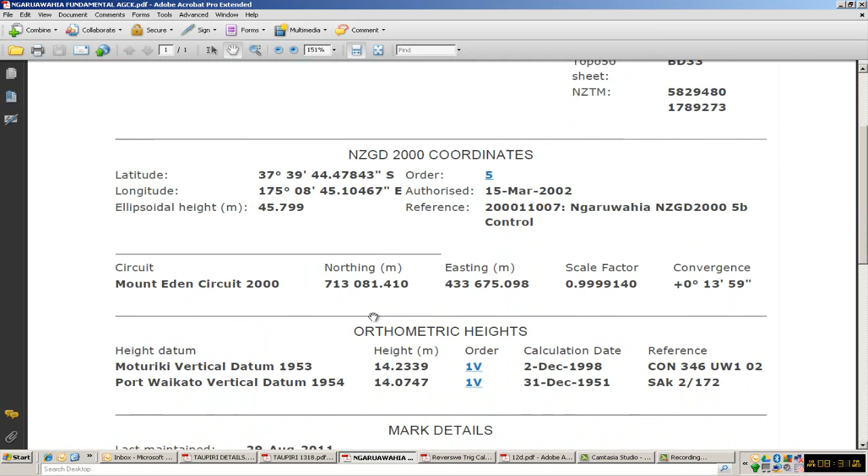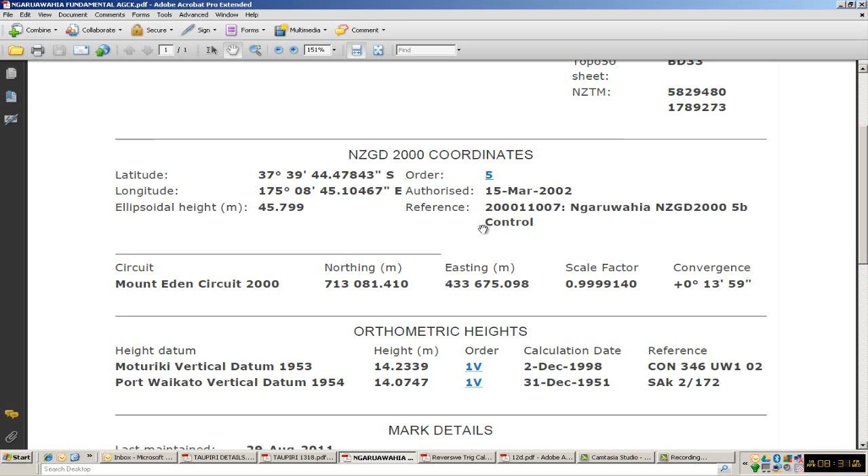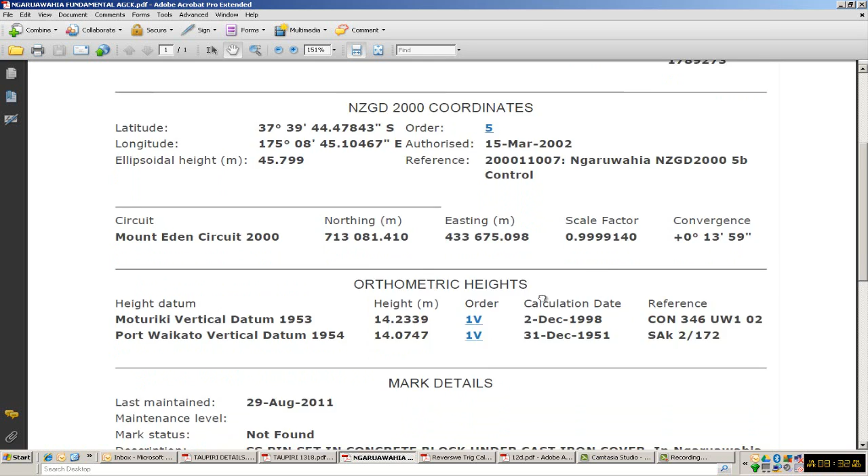Now we're going to be working in Mount Eden circuit coordinates, so we can see here that we've got the coordinates down in here, Mount Eden circuit coordinates, and we'll note that these are in New Zealand Geodetic Datum 2000 terms and they're fifth order coordinates. So they're reasonably accurate. It's a really substantial mark down by the band rotunda at the point. We'll also note here that it has heights in both Moturiki datum and Port Waikato datum, and the heights on this mark are to first order vertical. So that's a pretty substantial and significant mark.

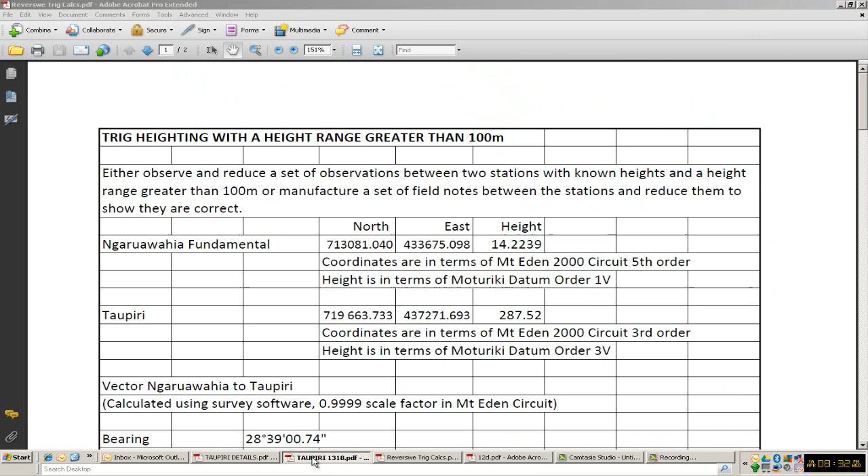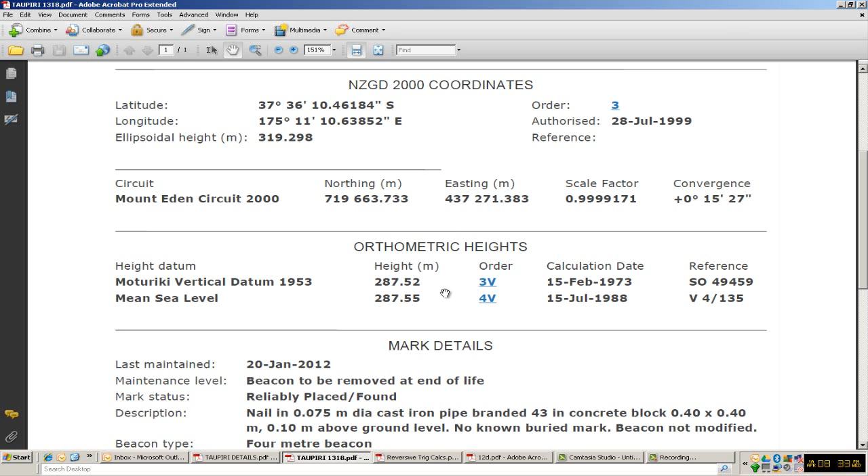And the next mark that I was going to observe to is Taupiri Mountain, a very significant mark in the area, and one that a lot of people would have driven by. So it's a significant third order trig. We see here it's got Mount Eden circuit coordinates. They're the ones we're going to be using, and it's got heights on it in terms of both Moturiki and mean sea level. So we're going to use the Moturiki height, which is a third order vertical height. Just notice that it's given to 2 decimal places. So not incredibly accurate as with the first order, but probably accurate enough for us to get some good value out of the exercise.

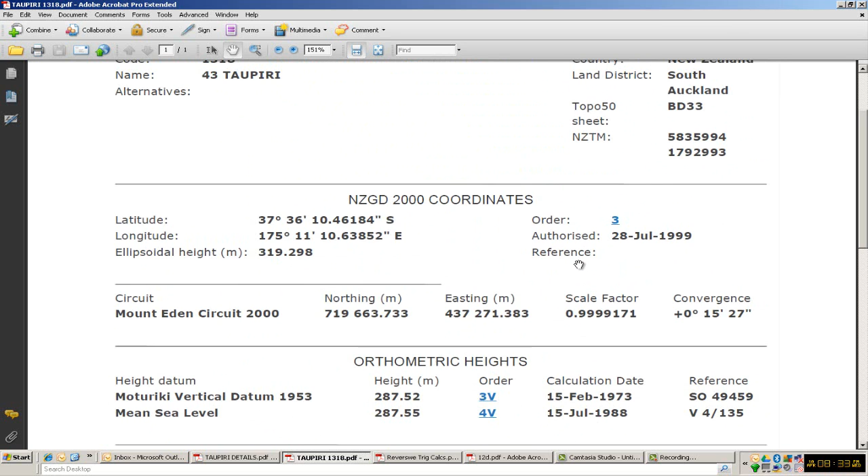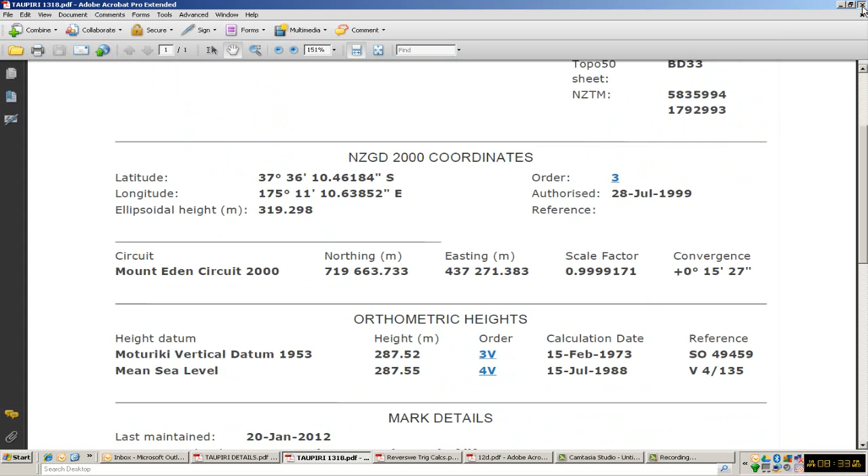Just a little bit of detail here about the mark. It's a 4 metre high beacon, so it's quite a significant beacon, and as far as I'm aware we can see it from the Ngaruawahia Fundamental, but for the purposes of this exercise that's not an absolute requirement. So here we go. I've put down our details, which I've copied, as I say, from the geodetic database, the LINZ site, and all those details that you saw on it.

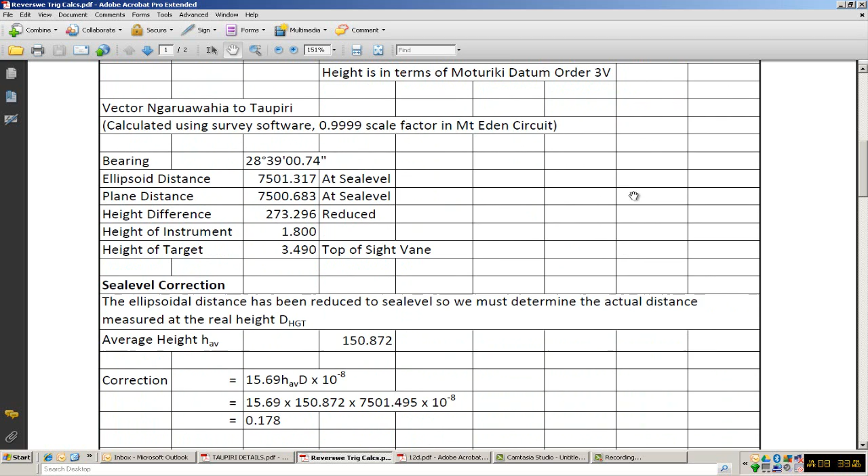So the next thing we want to do is calculate the distance between them. In some cases, when we do these things, we are able to measure, but in this case, we're just going to do a one-way trigonometrical observation, presumably from the Ngaruawahia Fundamental to Taupiri. And so we need to calculate the distance.

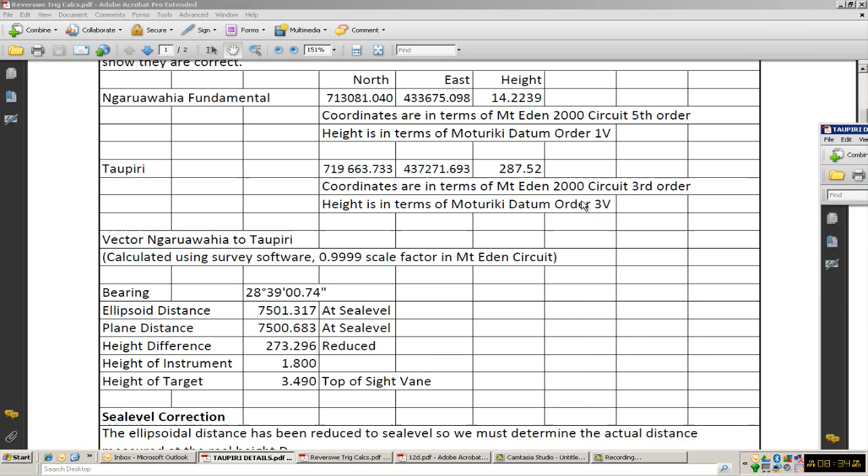But just before we do that, I see that there's a further little piece of information that we need, again from the geodetic database, and these are the details of the trig on Mount Taupiri. It tells us about the mark, how we can get there. But most importantly, it gives us some details of the beacon on there. In particular, I'm using this distance here, the 3.49, which is the height at the top of the vanes. And that's where we will be observing to with our virtual theodolite from the Ngaruawahia Fundamental. So just making you aware of that.

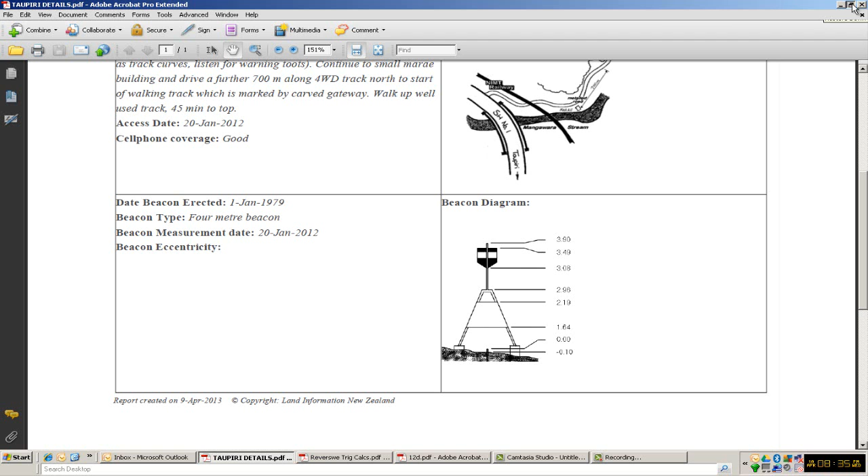Get rid of that, and here we are back to the thing. So the next thing to do is to calculate the distance between the two marks. Now we have to be very careful here because in the Mount Eden circuit, as you would have seen from the details there, we have this 0.9999 scale factor. So that has quite a significant effect on distances, particularly the ellipsoidal distances, which is the actual distance that we measure between the 2 points.

If we were to just take out a straight join without reference to the scale factor between the coordinates of the two marks, we would get a plane distance which hasn't taken account of the scale factor, and would in all likelihood be this 7500.683. Now note all of these distances here have been reduced to sea level.

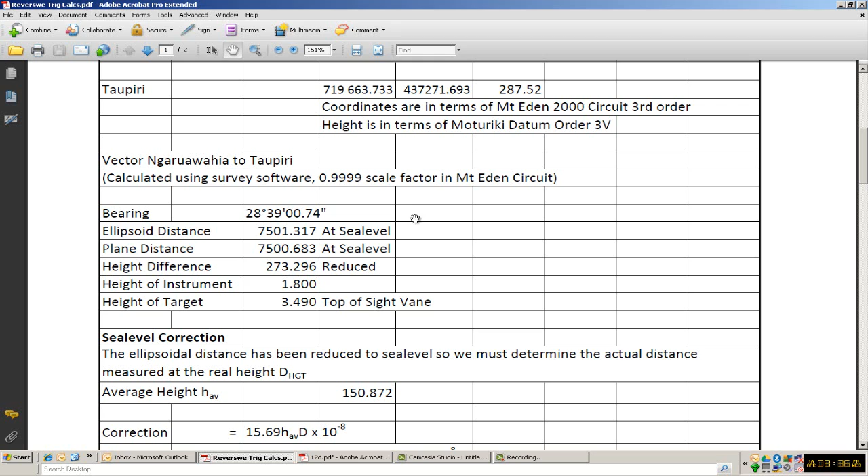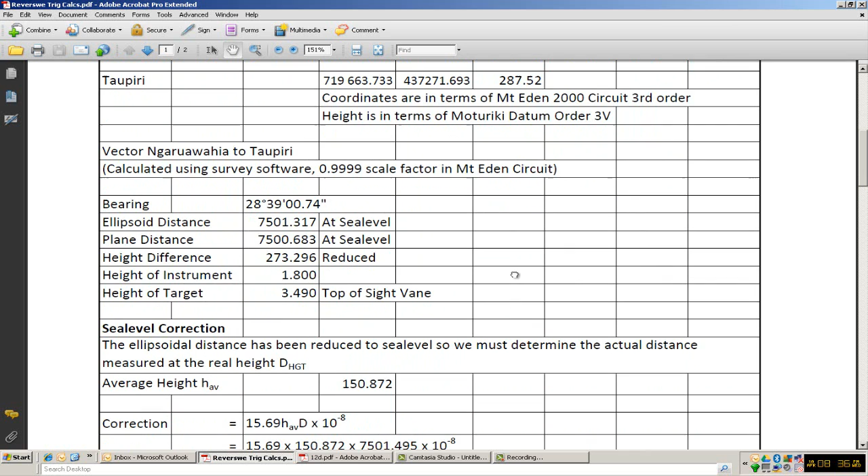So what I recommend here for working out this vector is that you use some sort of survey software to do so. So what I've done here is I've just got a screenshot of the survey software, illustrating the particular reduction that we did. And here it is. Here's a map. I've plotted the 2 points showing the Ngaruawahia fundamental and Taupiri, and I've done it in a traverse sheet situation.

So we've put in 1 here, the Ngaruawahia fundamental, and 2 the endpoint, which is Taupiri Mountain, and the coordinates there. And using that traverse sheet, we've got a bearing of 28 degrees 39 minutes 00.74 seconds for a distance of 7501.317. Note that's an ellipsoidal distance.

The software also has another means of measuring it, using a geodetic type measurement, or measuring ellipsoidal distances, and again it shows it here. It gives the plane bearing, which is 28 there, and the plane distance, which is 7500.683, which I've recorded. And here we have the ellipsoidal distance. Note down here the scale factor, which is 0.9999, very close to that. So you can see we've measured it both ways, and everything checks out.

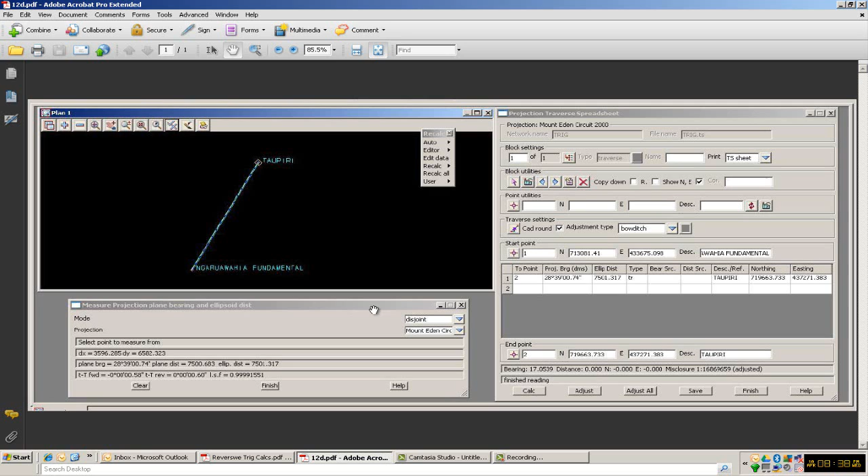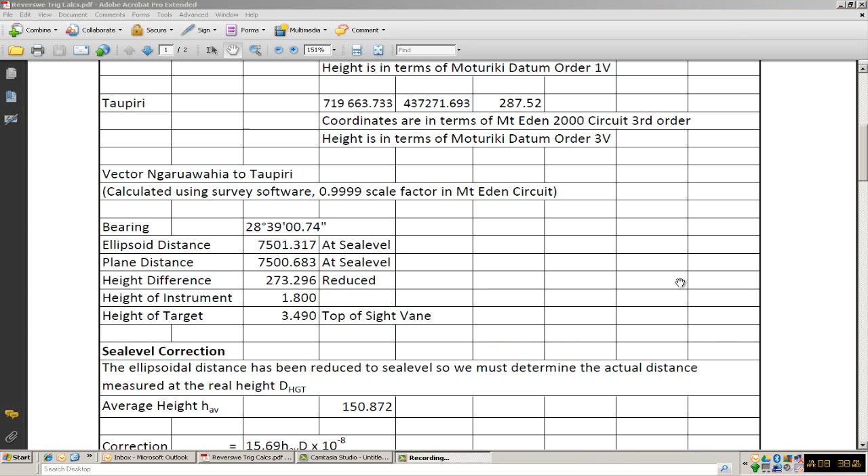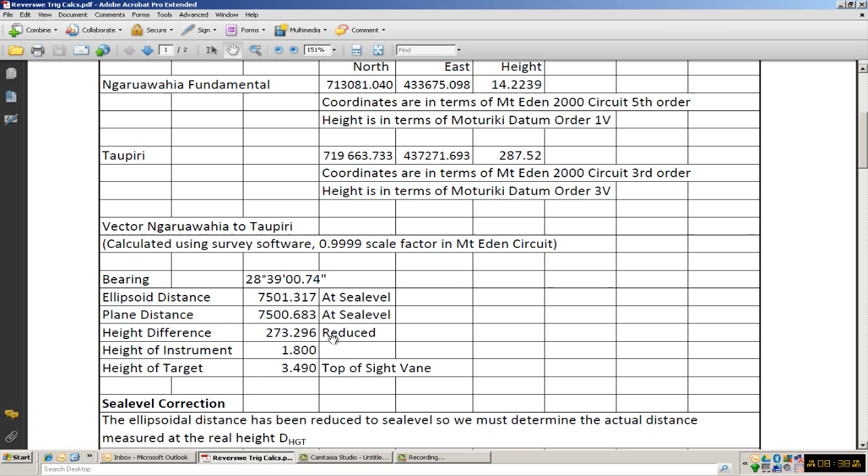So we now know that we have a good ellipsoidal distance, 7501.317. Okay, so let's go back now to our calculation. And here is all that information recorded here. I've just worked out the difference in height between the two heights. So that's 273.296, which is just 287.52 minus 14.2239. I'm tending to work to 3 decimal places where I can.

Right, here we are back again, and just going to look at sea level correction next. I should point out that the distance that we have determined here is the actual calculated distance. I haven't considered any of the corrections to a measured distance that might apply. So this is the reduced ellipsoid distance that would result after you had reduced a measurement with EDM or what have you. So because we're operating at height here, we need to consider that the slope distance we're observing is in fact measured at height. So we have to allow for sea level correction.

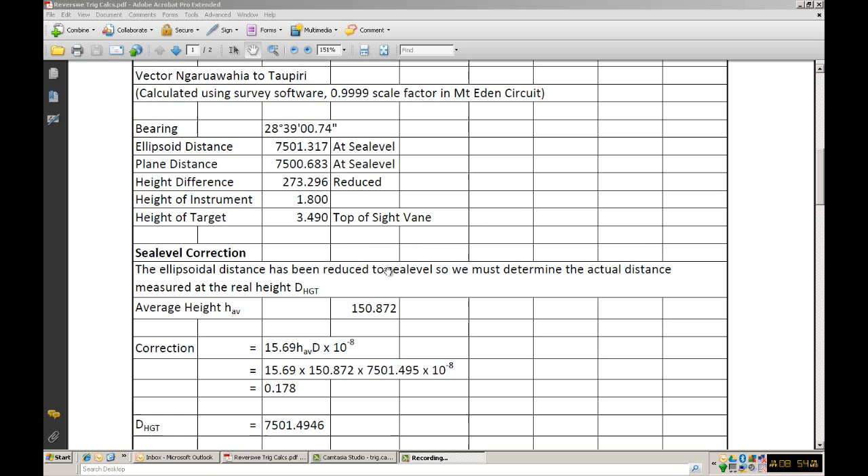So the first thing I've done here is to calculate the average height, which is what we do for sea level correction. So that's the height at the fundamental plus the height at Taupiri Mountain, added together, divided by 2. Now our formula for sea level correction is 15.69 times the average height times the distance times 10 to the negative 8. And that comes to 0.178 meters.

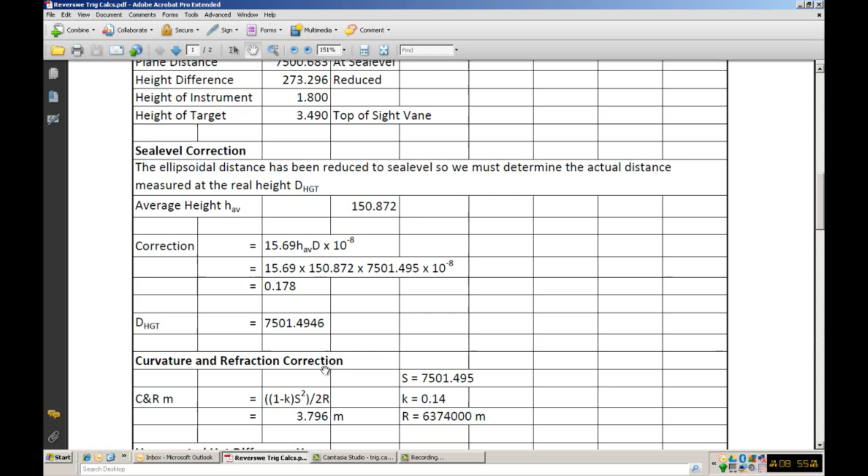So we must add that on to the distance that we determined up here, 7501.317, and our distance at height, unreduced to sea level, would be 7501.4946. It remains to be seen in this instance whether that would be significant in the calculation of the height difference, but for accuracy's sake I've done it here.

The next thing we need to consider is curvature and refraction, what effect this is going to have. Now the accurate formula for curvature and refraction, which you'll find in your notes, particularly Paul Denise's notes, is stated here: 1 minus k, where k is the coefficient of refraction, and the one that's commonly used is 0.14, times s squared, where s is our distance at height that we've worked out there, 7501.495 squared,

and then divided by 2 times the Earth radius, and that is 6374000 meters. And I emphasize the meters because it's given in the books as 6374 kilometers, but for the purposes of this formula it needs to be in meters. So when we work that out, we get a curvature and refraction correction of 3.796. Now normally the curvature and refraction correction is added on, but in this case, because we're working backwards, we are subtracting it. Same goes for the target height.

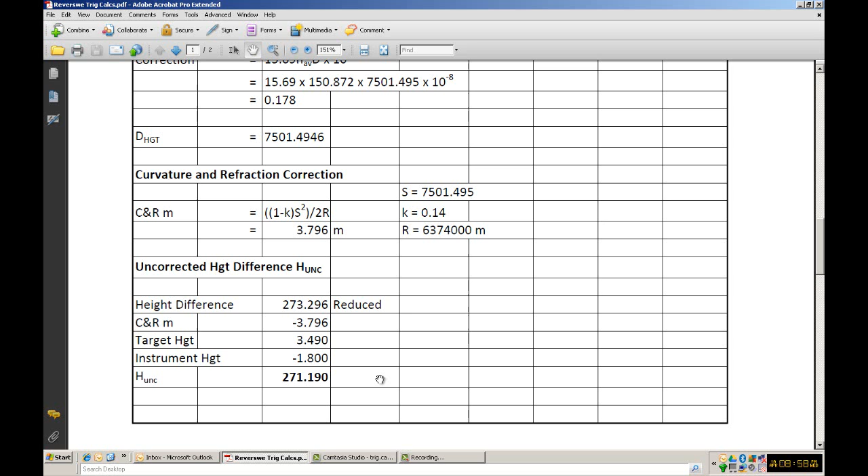And that gives us an uncorrected difference in height, this one being the reduced one of 271.190. Well, I've called it HUNC, meaning the uncorrected difference in height.

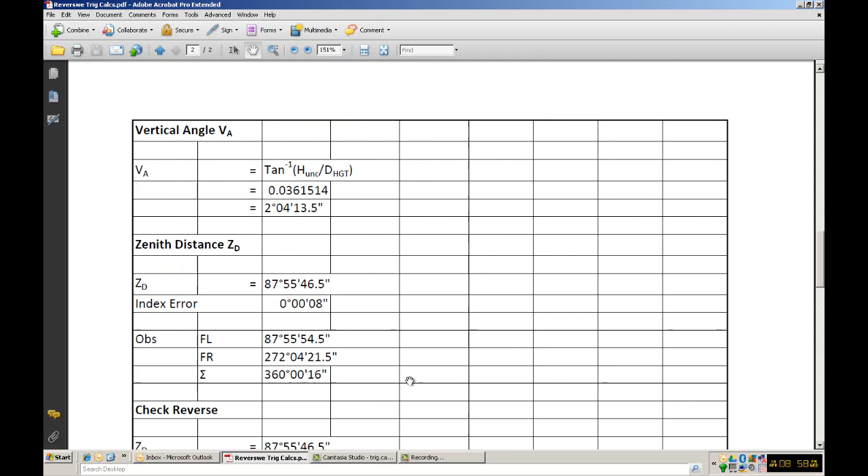So from that, we now are in a position where we can calculate the vertical angle. And the vertical angle can be determined as tan to the negative 1 of the uncorrected height divided by the distance at height. And if we do these in the calculator, that's 271.190 divided by 7501.4946, and taking tan to the negative 1 of that, we get 0.0361514.

Now I did a little bit of investigation here to see how many decimal places this calculation needed to be to get the sort of required accuracy. And I determined that it needed to be at about 7 decimal places. This is something, if you do this in a spreadsheet, that you can possibly do yourself. I just put in different values and converted them to see how things panned out. In fact, I actually did it on a scientific calculator, working out the different ones that I needed to show to get a reasonable angle.

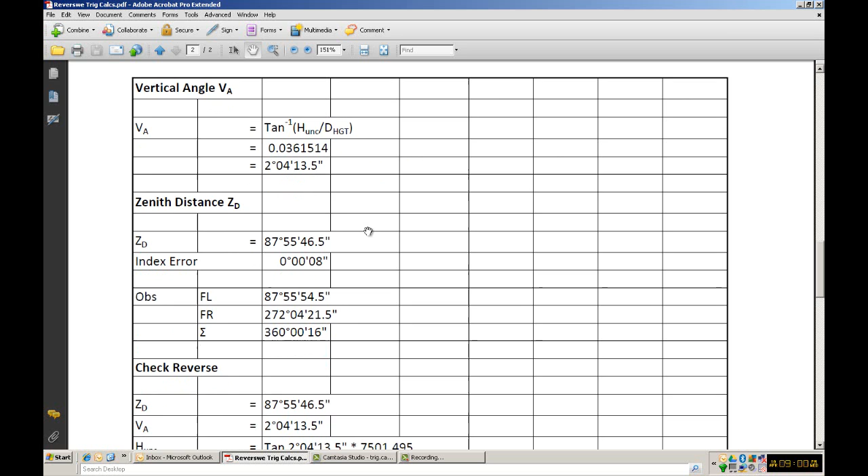I believe that I've got the angle correct to that first decimal place of a second there, which, seeing that we're possibly only observing to the nearest second, is pretty reasonable accuracy. So there we are, we've determined the vertical angle. Now what would this translate into as a zenith distance? Well, as we know, this is a rise or elevation, so the zenith distance would be less than 90. So we take our 2 degrees 04 13.5 off 90, which gives us 87 55 46.5.

And then, just to make things a bit more challenging, I thought, well, usually we encounter an index error, so I just arbitrarily said for this particular observation the index error was 8 seconds. You might like to choose one yourself, but seldom is it ever 0. So that gave us an index error, which leads us to a set of observations here.

Face left would be 87 55 54.5, so that's 46.5 plus our 8 seconds, and our face right, since the index error would apply equally to both, I added it so that they would add to 360 degrees 00 16, so that's 272 04 21.5 seconds. Now you can see that we've calculated a vertical angle up above of 2 degrees 04 13.5, and you can see our 04 21.5. If you take 8 off that, of course it gives you the 13.5. So that's a bit of a check as we're going along.

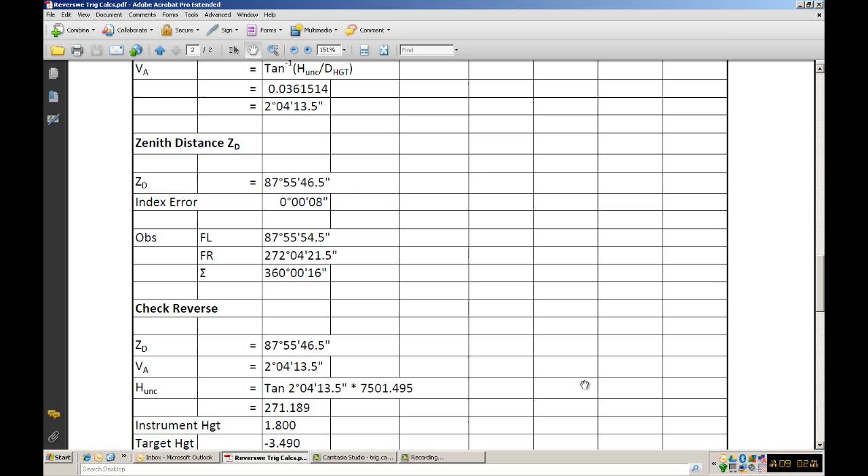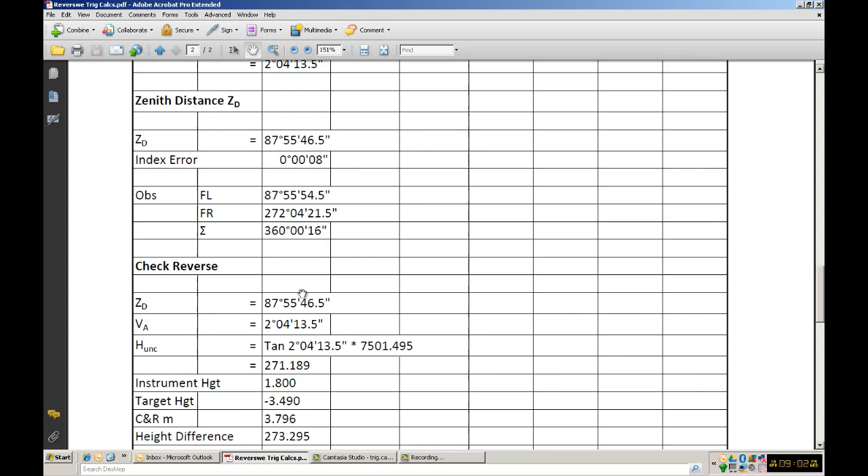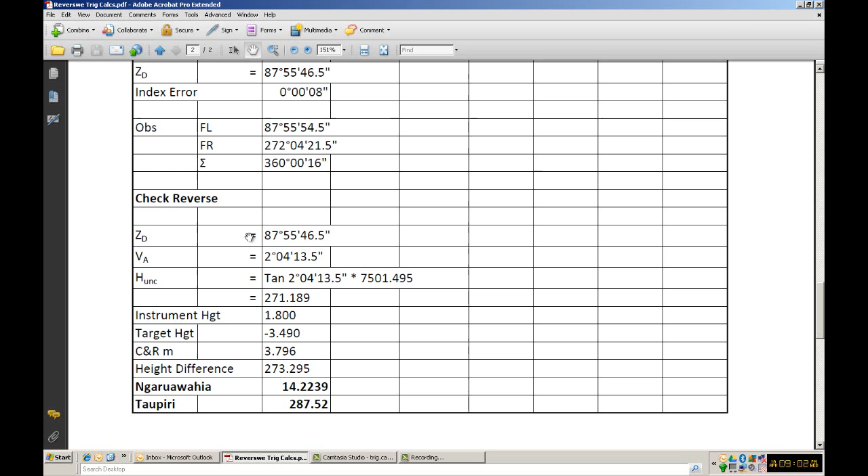Okay, so there we are. We've got our observations there. So let's just check that we've got them right by running them through in the normal course of things. So here we are. We've got our zenith distance, in this case adjusted for index error, of 87 55 46.5, which translates to a vertical angle of 2 04 13.5, which again agrees with what we've got up above.

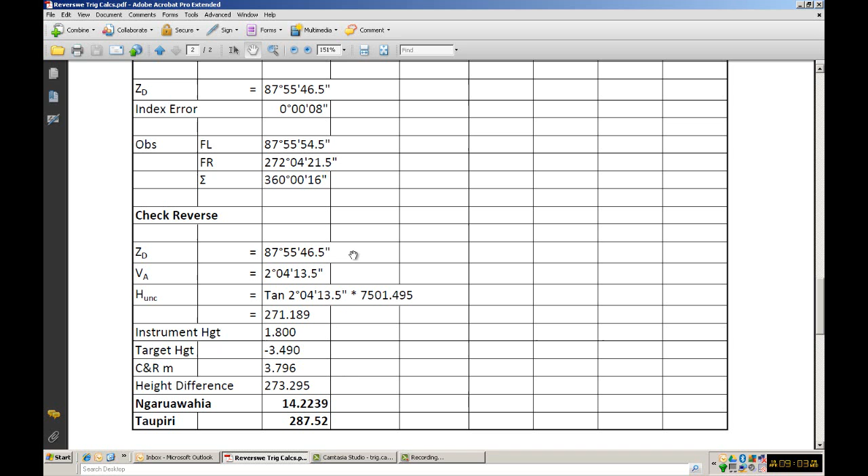If we take the tan of that and multiply it by the distance at height that we determined above, which would be unchanged, we get a difference in height of 271.189, which agrees within about a millimetre of what we determined further up, 271.190. So we're out about a mil. That's resulting from rounding errors and calculating in various calculators and things like that.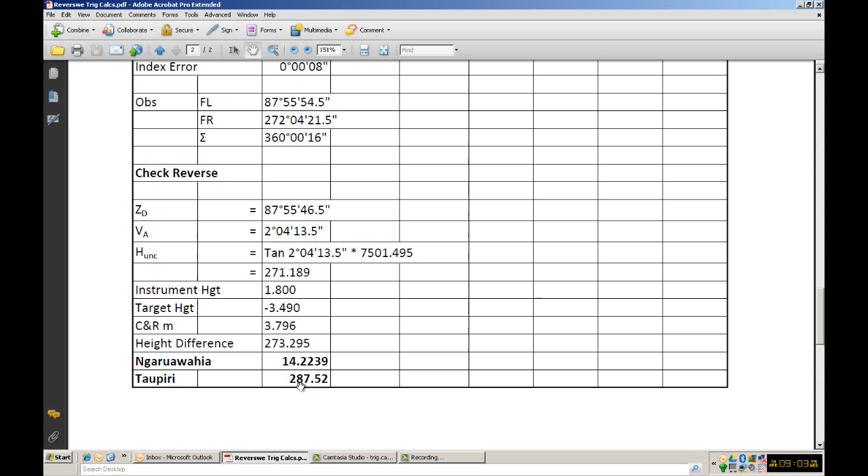So we add on our instrument height this time rather than the reverse, and we subtract our target height, and then, because we're at elevation, we add our curvature and refraction, and that gives us our height difference of 273.295, which we then add to our height for Ngaruawahia, and that gives us our final height for Taupiri Mountain of 287.52, which I think we'll find is in general agreement with what we started with.

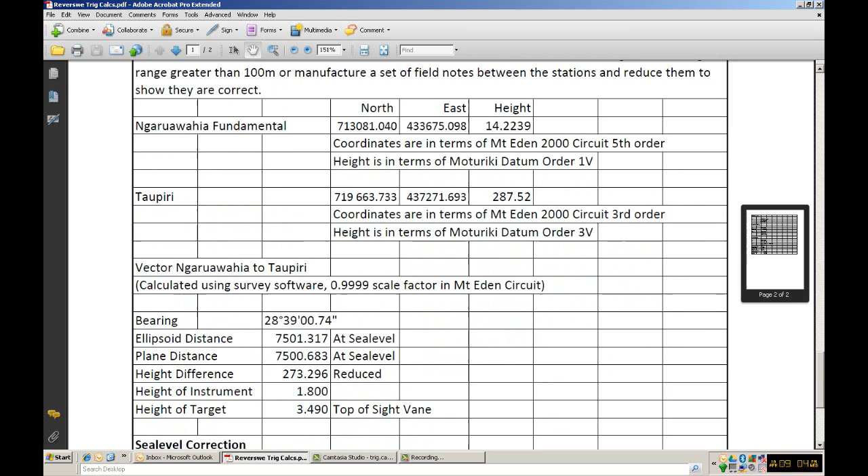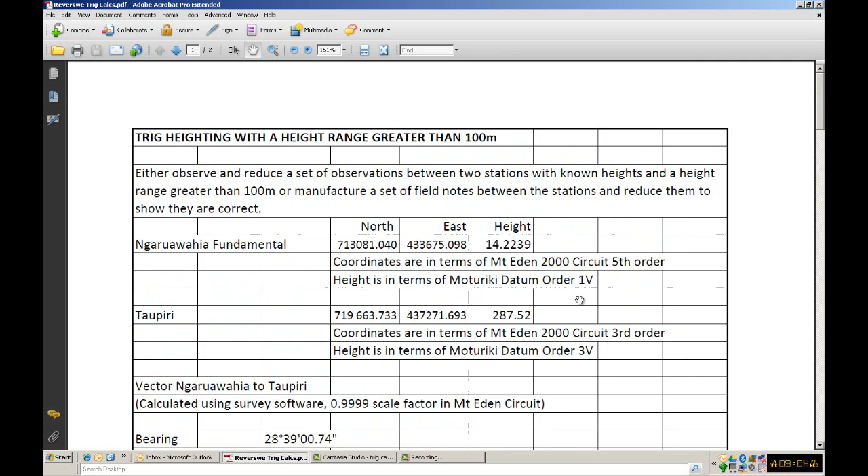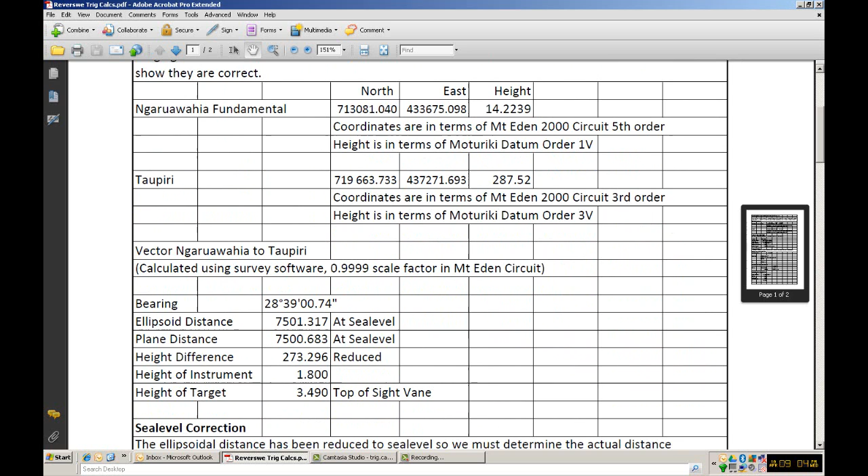So there we have a reverse engineered calculation, which is good evidence that we are fairly familiar with this operation of calculating trig heighting with the height range. So what I suggest you do yourselves, to provide your own evidence, is choose perhaps 2 marks that you are familiar with that have a height range of greater than 100 metres, and come up with a calculation of your own.